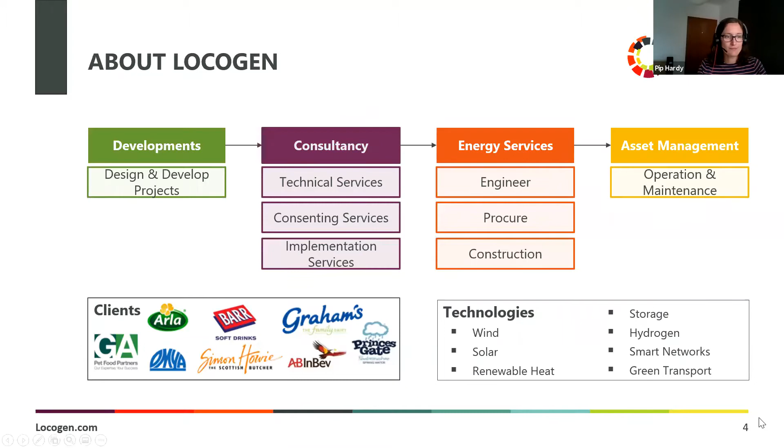The webinar today was prompted by the conclusion of phase 1 of the UK government's Green Distilleries competition, which some of you may have heard of. The competition provided funding for developing technologies that enable the use of low carbon fuels in a distillery. 17 feasibility reports were funded, and LOCOGEN were fortunate to win 3 of these. And one of these was with ARBIKIE, which is why Ian's joining us today.

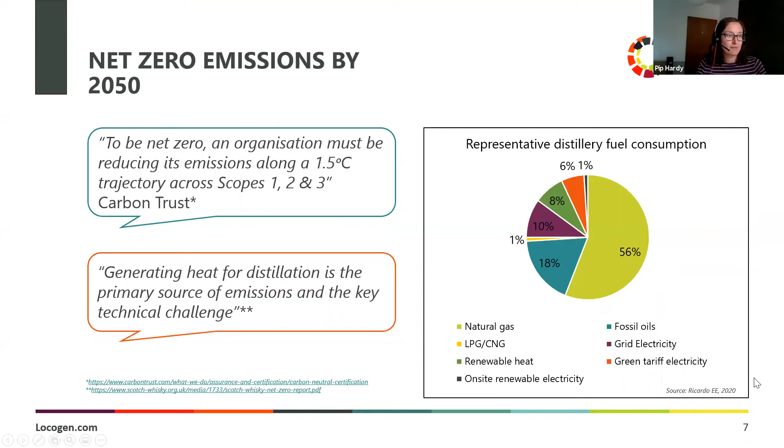Yes, thank you. I'll very quickly give you a quick introduction to ARBIKIE, talk through NADAR gin, our climate positive gin, and then talk through the next steps. So in terms of ARBIKIE, we do aim to be one of the world's most sustainable distilleries. We're on a journey and we're making progress through that journey with partners like LOCOGEN.

We're a field to bottle distillery, so we grow, mature, distill and bottle on a single site at Lunan Bay on Scotland's east coast. So we have the advantage of farming for 400 years as a family. So there's a farming base there, and we built the distillery on one of our farms that was called ARBIKIE, hence the name. In terms of importance for this discussion, NADAR is key to that because we've created and distilled the world's first carbon negative gin and vodka.

We're also distilling Highland Rye, the world's first rye Scotch whisky. This was done roughly about 200 years ago, so it's a revival. It's not brand new, but we're bringing something back that used to happen in the past, which is always great. And we're adopting regenerative agricultural practices and growing all the crops and botanicals that we need to distill. So single estate, just as you would do in wine. That's our approach. That's the way we work. And within that process, energy was basically the next stage of our journey. So hence why we engaged with LOCOGEN.

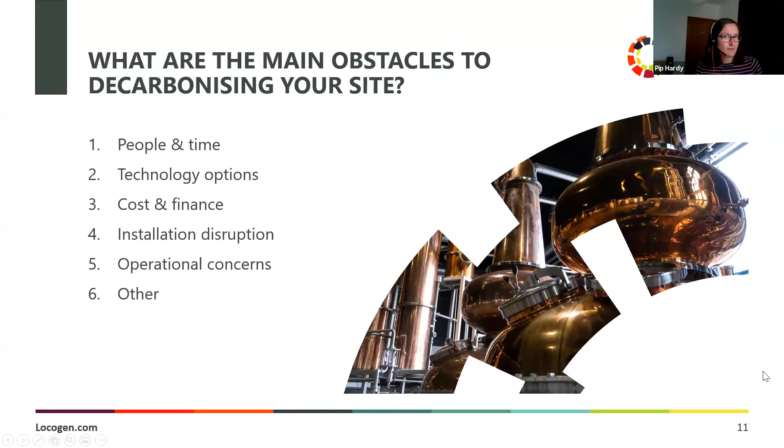And we will address the results. So it looks like the majority of people today are ticking cost and finance, which is not a surprise, and something that Jack is going to touch on just now. So I'm going to hand over to Jack, and he's going to talk about the low carbon energy options and address the cost and finance issues.

Yeah, hi, thanks Philippa. Hopefully that's, as I take control, a seamless transition.

So as you already mentioned, heat is the largest carbon emitter associated with distilleries, and the distilling process itself accounts for over three quarters of overall energy usage for distilleries. Now, we appreciate different distilleries have their own modifications of the general spirit making process, but we can generalize with this simple schematic, which shows thermal energy applied at the wash and spirit stills. And of course, thermal energy is also applied in the mashing process prior to fermentation.

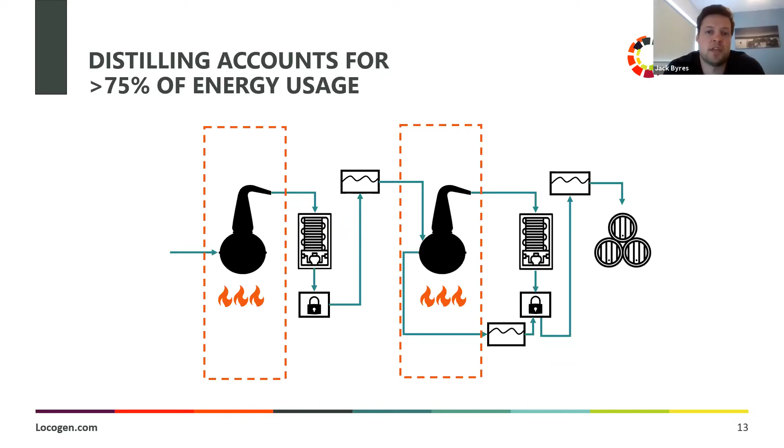Now, conventionally, in the vast majority of cases, this thermal energy is applied via steam, and this is raised in a boiler with a burner attached, which burns either natural gas or oil. So what we want to focus on is how we displace this reliance on fossil fuels with new technologies and energy sources. There are many potential options to decarbonising distilling, and we split these into three broad categories, namely hydrogen, electricity, and bioenergy.

It's worth noting that these options are not necessarily exhaustive, but I think it's fair to say that they are the most prominent, and LOCOGEN have experience of looking at all of these. So we're going to focus in this presentation on hydrogen, high temperature heat pumps, and thermal storage, all on the back of our green distilleries work. The following slides will discuss the relative benefits and some considerations, all drawing on our real project experience.

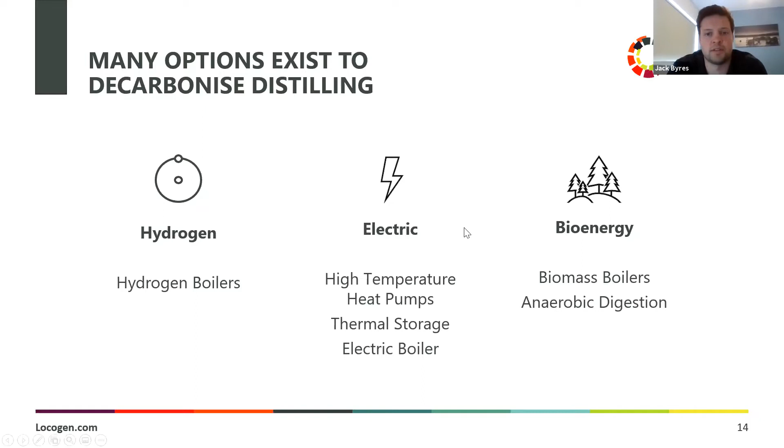So we'll kick off with hydrogen, considering that's what we've been investigating with our co-presenters, ARBIKIE. Specifically, I'm talking about green hydrogen, so that's hydrogen created via electrolysis, where the electricity has come from renewable sources. The combustion of hydrogen is very similar to that of fossil fuels, whereby you need a burner and a boiler. And a big benefit is that these components are commercially available already: the burner, the boiler, compression and storage vessel.

And burning hydrogen is capable of reaching the same temperatures with the same ramp rates as the fossil fuel it would be displacing. There's also a relative simplicity in retrofit, whereby at worst you would have to replace your existing burner and boiler. That means that downstream of the boiler, there's no change to the process of making the spirit, and therefore no impact on the end quality.

Hydrogen can be created from renewables, as I mentioned, from electrolysis, and this can be from on-site renewables. And this will inevitably lead to an excess of hydrogen and oxygen byproduct, and this can be sold to third parties to generate a further revenue stream.

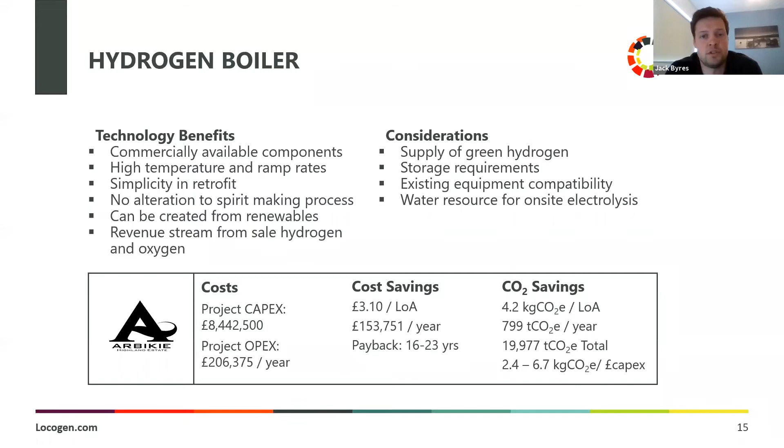The end result, though, is a huge cost saving of over £3 per litre of alcohol produced, as well as enormous carbon savings. Now, you can read more about this in our publicly available reports, but just a bit of additional information in that we conducted a thorough constraints mapping exercise at ARBIKIE. So this is with the view to maximising the on-site generation and then optimising the size of the storage to make sure that we could provide the greatest quantity of hydrogen within a viable business case.

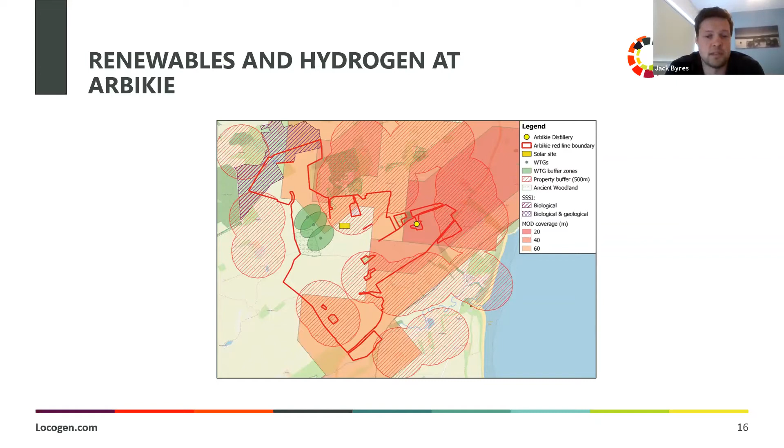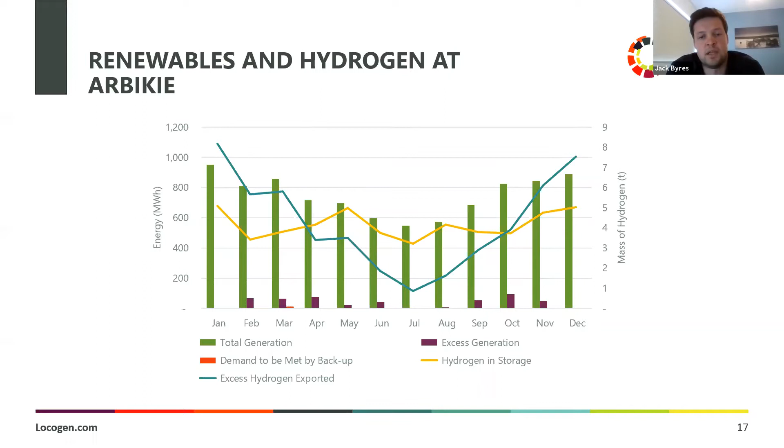So our modelling showed that to provide 100% or near enough 100% hydrogen, you would end up with a significant excess of hydrogen. Therefore, we looked at available local and regional hydrogen markets and found that these would be accessible to us. There is a slight potential due to the intermittency of renewables that you would need some backup for less than a percentage of the time. Therefore, we recommended that the existing boiler and burner system is retained to ensure resilience in the overall energy system.

So we'll move on to thermal storage now, and as part of our Green Distilleries work, we investigated the Lumenion high temperature heat store in a new build distillery in North Uist. Now, this heat store works by importing electricity and then heating up the storage medium and then dispatching this as process heat. And we found that the dispatch heat was at a temperature more than capable for distillation and could be dispatched at a rapid ramp rate and very high efficiency.

And because this is run on electricity, it can be integrated with renewables. This could be on-site renewables again, but also perhaps curtailed energy from existing wind farms, for example. And this is an important additional benefit, as a lot of distilleries are located in remote places where this heat store can actually help overcome those grid constraints.

Due to the rapid response rate of the heat store, it's also capable of participating in grid balancing services. So we partnered with Flexitricity to look into this, and you would require an aggregator such as Flexitricity to take on the management of this asset. So you could use them to optimize the heat store so that your running costs are minimized as much as possible. So you're using energy when it's cheap, basically, from the grid.

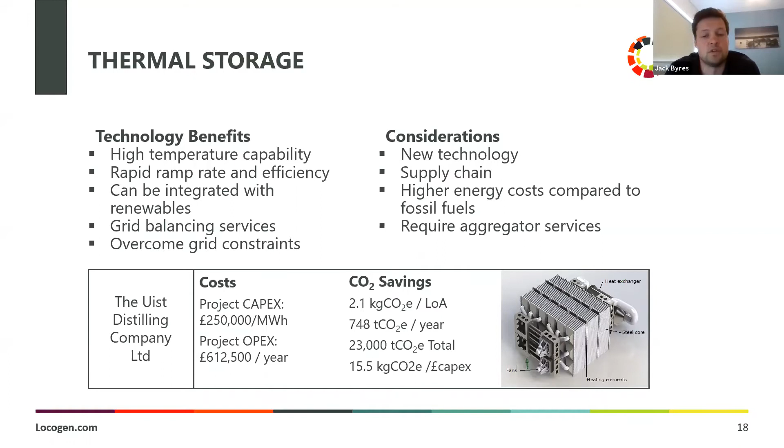So we'll move on to high temperature heat pumps. For the benefit of those who might be unfamiliar, conventional heat pumps extract heat at ambient temperature from the air, water or ground environment and use electricity to boost the temperature of this heat source and deliver it, normally for space heating. A high temperature heat pump works with the exact same principle. The only difference is that the heat source is at a much higher temperature. So it's been extracted from another process, for example, from waste heat from a distillery.

The main benefit of a high temperature heat pump is the efficiencies and the massively reduced energy demand. And this is particularly the case if you integrate it with heat recovery within the distillery as well. And because this again reduces the demand so much, it can actually act as an enabler for other low carbon technologies, as well as a solution in its own right.

A large consideration is that the high temperature heat pump would require retrofitting of existing distillery processes. So that is something to bear in mind. And also it is likely that a backup source of energy would be required to kickstart the process and also potentially needed as a temperature booster.

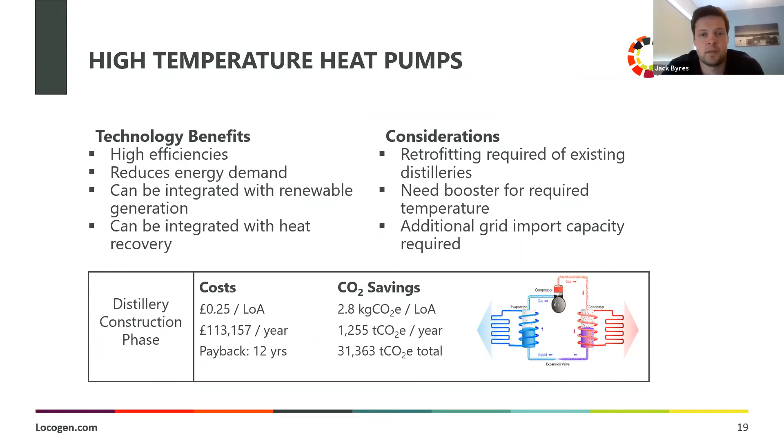So we can generalize the relative benefits of different options, but really it comes down to site specifics and circumstance. So for carbon emissions, that is pretty much wholly dependent on where you're getting your electricity from, for example. And that, of course, has a knock-on effect on your operational costs. If you're installing on-site renewables, obviously your capital costs are going to increase. It's worth noting as well that these options aren't necessarily mutually exclusive. They can be combined to provide a more optimal, holistic overall energy system.

What has become apparent from our years of looking at decarbonising distilleries and the wider process heating industry in general is that unfortunately there is no one size fits all. We need to be conscious of the technical risks as well as possibilities. For example, is there land to install renewables on site? We also need to be cognizant of any financial implications. So the renewable heat incentive and the feed-in tariff are no more. So how do we work with the distillery to create a viable business case? Is there grant funding available, for example?

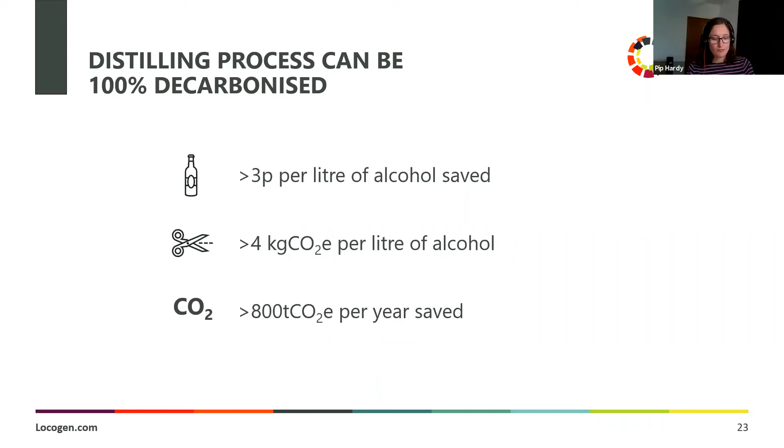And distilleries, like most industries, do need to think long term. So what we've done here is taken some publicly available data on fuel, oil and electricity costs. And we've modelled the cost of these fuels out to 2050 for 3 different technologies: a hydrogen boiler, the thermal store, so steel thermal store, and the high temperature heat pump on the right.

So regardless of the technology, you can see the orange line is fuel oil and the teal line is electricity. And completely independent of the technology, you can see that fuel oil is expected to increase. So whereas it's low today, it will continue to increase, and around 2040, it's expected that electricity costs will reach parity and then decline below the cost of oil.

And really, to achieve net zero, this is going to have to happen. It doesn't really matter when, if it's 2040, 2030, or somewhere between the two, but it's going to have to happen as we need to move away from oil and gas. The purple line in all of these graphs represents the cost of fuel for the low carbon technology options. So that's hydrogen and electricity.

And you can see that this is, in some cases, already lower today than the equivalent oil cost. And that's mainly due to the higher efficiency of the new technology, as well as the lower fuel input cost. So for example, for ARBIKIE, we're using renewable green electricity from on-site renewables, solar and wind.

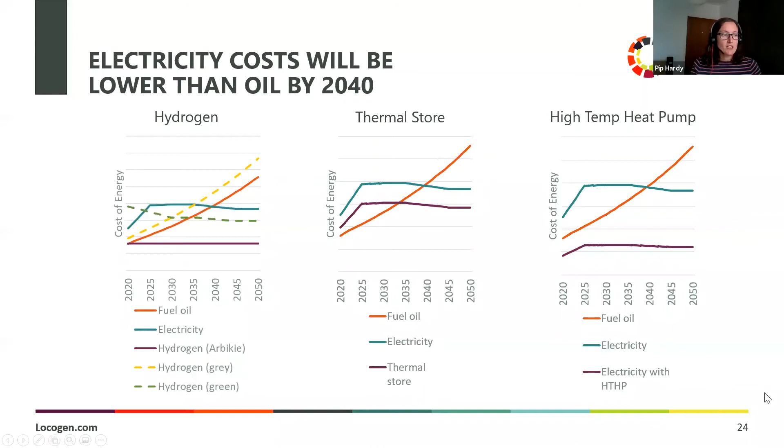So before we move into our Q&A, some final thoughts. From our green distilleries projects and our wider work with distilleries and other industries, there's three key takeaways really. Firstly, as Jack's already mentioned, there is no silver bullet in terms of switching technologies. There are many options available. It's going to be bespoke to your site, and all technologies have their own benefits and considerations. So a feasibility study is required to select the most suitable technology for your site.

Financial feasibility can be difficult for new tech due to the higher capex cost and the very low oil and gas benchmark costs, especially for electrically driven new technologies. However, this isn't always the case, and there are exceptions. Also, the running costs of new technology can also be lower, even with today's costs.

And finally, with the price of electricity reaching parity with fuel oil in 2040, adopting low carbon technology today is a long-term strategic choice. And what's more, early adopters can benefit from grant funding. So proactive companies that are seeking new solutions today, whilst there's grant funding available, will stand to benefit. And the Green Distilleries competition is an example of the type of funding that is available.

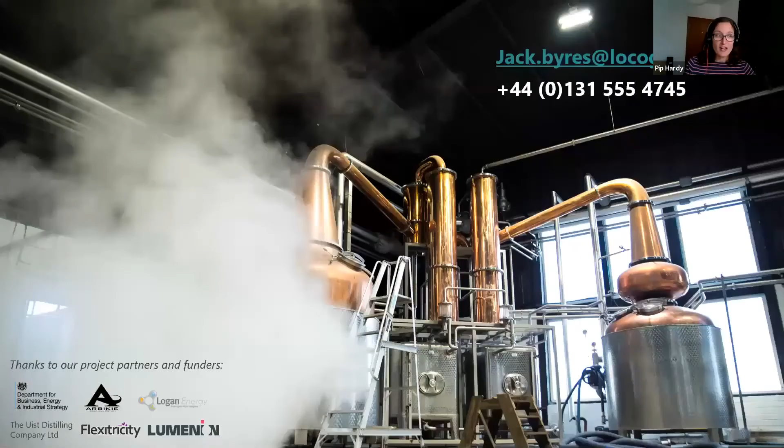But now we've got about 10 to 15 minutes to answer your questions. We've got a couple already, so keep them coming through, and it can be for Jack or Iain. I think I'll kick off with a question for Iain to get him back online. Iain, from an ARBIKIE perspective, what do you think other distilleries should be doing right now with regards to net zero?

In reality, working on it, because the sooner you do it, the better. From our point of view, we're building a legacy business, so it's better to build it in as soon as we can, just as you spoke about, because you could wait, but if you wait, it may not be possible to do it. We'll look at all the options, and I think everyone else should do the same, because I think the distilling industry should be leading on this and addressing it.

And I'm sure, as you spoke about the SWA, there's a lot of giant steps being taken, but there's a lot of work to do, and it's a very important industry for Scotland in particular. So we are keen to push ahead because we're doing it on all fronts, and it's fundamentally important to us, but also I think it's fundamentally important to the industry, having worked for a number of distilling companies in the past.

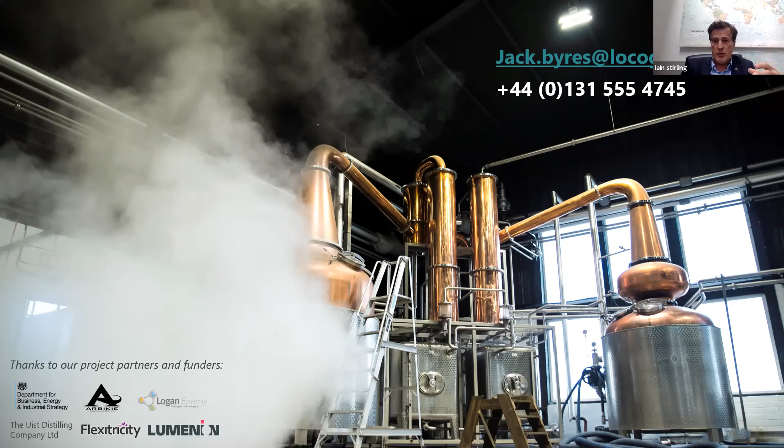And hence in the last slide, my comments about packaging and shipping, that's another focus for us, because obviously as an exporter, you're shipping stuff around the world. So we need to address that, and we are addressing it, and we'll announce some stuff within that space fairly soon, because we'll address as many elements as we can as a responsible manufacturer, if you want to call it that.

Great. And again, in the reports for all of the green distilleries projects that we've done with our partners who are named on the screen just now, as well as the others, 17 reports in total, there's a lot of learnings out there that are readily available and public. Go and have a read on gov.uk, and the link was in the slides earlier on. And another one to look at when we talk about net zero is science-based targets, a great website to check out for that.

There's another question from Peter on why solar PVT has not been discussed. I think obviously limited time; we at LOCOGEN look across all low carbon technology options. So if you want to chat about any of the technologies, feel free to get in touch with us and we'll be happy to discuss that. We're always on the lookout for new and innovative technologies as well. And the funding rounds that come through are often looking at new ways to do things, like the recent BEIS long duration storage call.

Let's have a look. Loads of questions coming through. This is fantastic. It's great to see so many people interacting and having lots of questions that hopefully we can answer.

So we've got a question on high temperature heat pumps from Sarah. So in the case of retrofitting a high temperature heat pump to a working distillery with limited space, what would be the expected footprint for a booster and backup required? So I guess it's a space concern. Yeah. Jack, have you got anything to add to that?